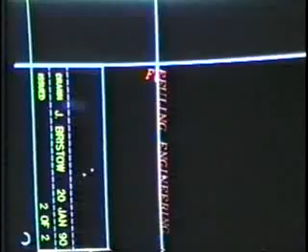You're about to see the Feuling and Rivera 4-valve head designed for the Harley-Davidson Evolution engine. You will see the head in production and an easy step-by-step how to install these revolutionary heads onto a Harley-Davidson motorcycle. The head itself is the brainchild of Jim Feuling, whose engineering accomplishments and world speed records are well known

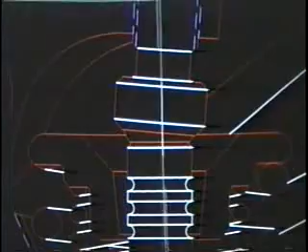throughout the automotive world. He designed the Oldsmobile Quad 4 2.3-liter engine, which puts out over 1,200 horsepower. Jim took this vehicle to the Bonneville Salt Flats and drove it at over 280 miles per hour. That same kind of engineering has gone into the development of these heads. The technology and equipment utilized in producing these 4-valve heads is truly world-class, state-of-the-art.

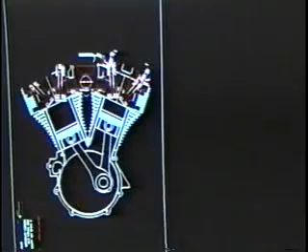The managing editor of Hot Bike magazine rode one of these test bikes throughout the southwest United States. The desert heat and pace was intense, but the bike never failed to provide 100% reliability at astonishing performance levels. We're now going to take a look at Feuling Engineering's manufacturing facility. Here you'll get a look at some of the operations that it takes to manufacture these heads.

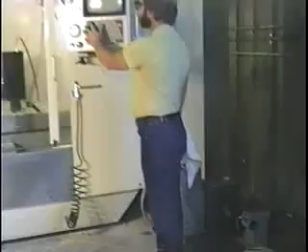After the heads have been received from the foundry, they're installed into this computer-controlled machine. Now this American-made machine is capable of machining 5 separate surfaces in one programming. You're watching it mill out the O-ring groove in the top of the head.

Now this machine is capable of changing its own tools automatically. As you see from this side view, it will also automatically index to the next machining position.

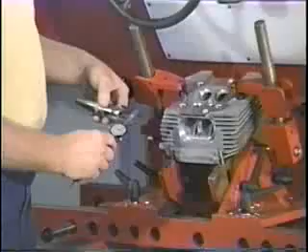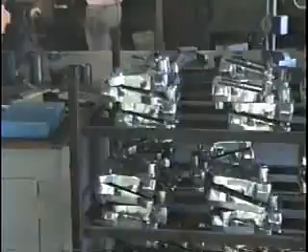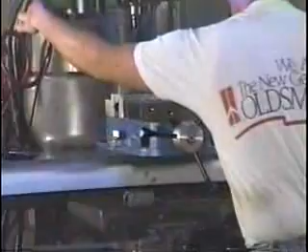You're looking at a stack of polished rocker boxes ready for assembly. And in the background is yet another computer-controlled machine. Now this machine is drilling the oil holes in the rocker arms themselves. And incidentally, these rocker arms have a tensile strength much stronger than the stock rocker arms.

This is one of the test bikes that has just undergone thousands and thousands of test miles. Notice the patented Feuling anti-reversion exhaust system. This exhaust system greatly increases the horsepower generated by these 4-valve heads. And speaking of horsepower, take a look at the bench flow test that these heads have undergone.

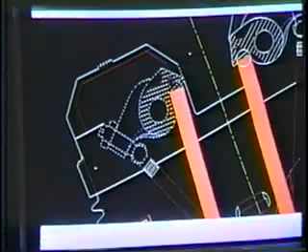It's easy to see that these heads are not copies. These are American-made heads designed by Americans for the American-made motorcycle.

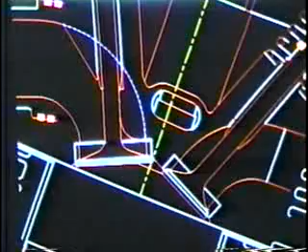And now let's take a look at what the Stage 1 kit has to offer. Now we're going to show you an array of parts and assemblies along with some accessory pipes and mufflers that are available from Rivera Engineering. The heads and the rocker boxes come assembled.

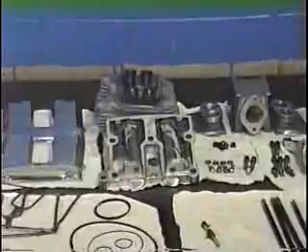After you remove the stock heads from your motorcycle, bolt the cylinders down, taking care that you do not disturb the base gasket. Then you need to install a dial indicator on the front cylinder, put the engine in gear, and rock the rear wheel back and forth until you've found top dead center. Then back the engine up 248 thousandths.

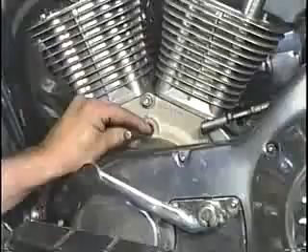Now once you've done this, you'll need to mark new timing marks on the flywheel. Now if you use a center punch, tap very lightly. Only a light mark is all that's needed. And we suggest that you use 3 light punch marks as your new timing mark.

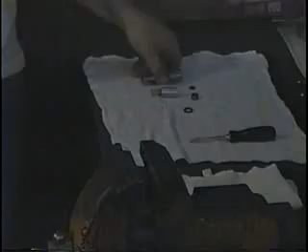Now if you have a stock ignition, or you do not require your motorcycle to rev higher than 5200 RPM, you won't need to disassemble your hydraulic followers. However, if you do require the motorcycle to rev higher than 5200 RPM, you'll need to install rings in the hydraulic followers, as you see here, which will cause these followers to be semi-solid.

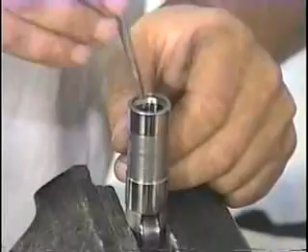Now again, you'll only need to do this if the motorcycle is going to be running higher than 5200 RPM. Now once you've installed this ring, simply reassemble the hydraulic unit.

If you're using a vise to hold the lifter in place while you're assembling it, take care that you do not over-torque or over-tighten the vise on this lifter. Now obviously these rings, if you're going to use them, need to be installed in all 4 hydraulic lifter units.

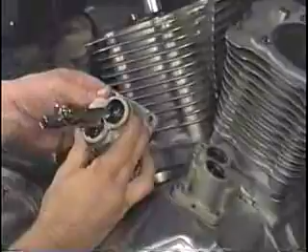And now the lifter units can be reinstalled into the lifter blocks, and the lifter blocks then inserted into the engine. Now we're using a pair of needle nose vise grips to hold the lifters into place. If you do this, make sure that you use very little pressure. Now on the bottom side of this block there is a little flange that will need to be aligned in order for it to drop into place.

Now once you've squared up the block to the engine, go ahead and put the bolts in and then just torque them down. And incidentally, you can find the torque settings for these bolts and others in your shop manual.

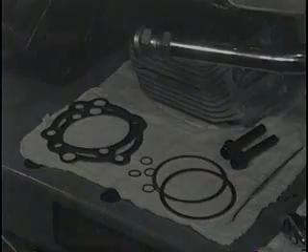Now your kit comes supplied with new head gaskets and dowel pin O-rings. In fact, we supply Millmeyer Pro Street gaskets, which are the best available. Go ahead and put these gaskets and O-rings into place, starting with the rear cylinder. Now the rear cylinder should be at top dead center, compression stroke.

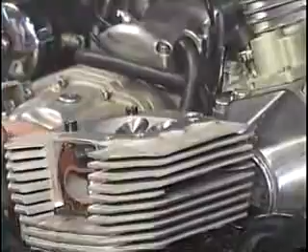The heads come with 2 of the head bolts already in place. Brush on some anti-seize compound, and that should go onto the threads of the head bolts. You should also apply a drop of oil underneath the head of the head bolts. This will ensure a correct and true torque reading.

Again, once the anti-seize has been applied to all 4 bolts and a drop of oil under the head of each bolt, go ahead and torque the head down. The torque sequence and the torque readings required can be found in your shop manual.

Once the rear head has been torqued into place, simply repeat the procedure for the front head. Now remember to put the gaskets into place and the O-rings into place first. As you can see, a dab of anti-seize is being applied to all 4 head bolts, and a drop of motor oil is being applied to each of the head bolts just beneath the head itself.

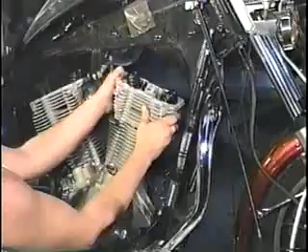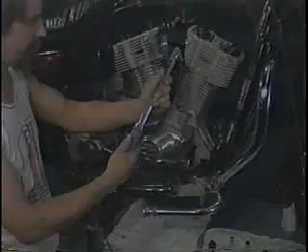When putting the head into place, don't forget that there are 2 dowel pins that need to be aligned up. And once that is done, simply run the bolts down just as you did with the rear head. Now, as the manual indicates, he's beginning with a low torque reading, and he will torque each of the bolts down according to the specifications and the torque sequence in the manual.

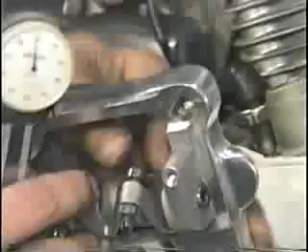These swivel foot adjusters can now be installed into the rocker arms. Simply thread them in, and the locking nut or jam nut needs to be installed on the opposite side. Now, using a dial indicator, you will need to adjust the adjuster on the right side of the engine to 100 thousandths clearance. Now, this clearance setting is for cams which have 500 thousandths lift or less.

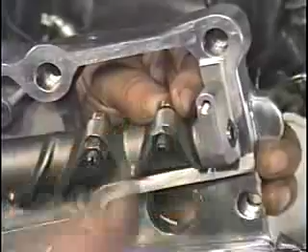Once you have it adjusted, tighten down the locking nut. And after you've done that, it's always a good idea to double check to make sure that your adjustment setting hasn't changed. Now, the adjusters on the left side of the motorcycle will be adjusted later. That's both intake and exhaust.

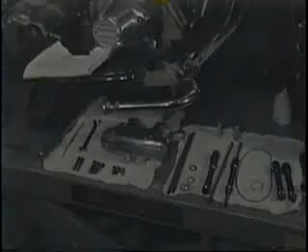Now install the O-rings that fit into the top of the cylinder heads. There will be a small O-ring that will fit around the spark plug hole and a larger one which will fit around the outside perimeter. You simply use your fingers to press these O-rings into place. Take your time and make sure that the O-ring has not been twisted. Now, when these O-rings are installed correctly, they provide an absolutely oil-tight seal.

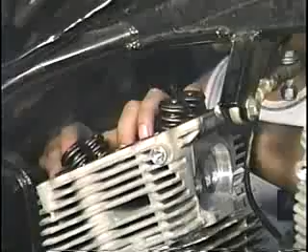Now the O-rings need to be installed on the ends of the pushrod tubes. There will be one O-ring which will fit where the telescopic tubes fit together, one on the top of the tube, and the bottom O-ring can be pushed into the lifter block itself.

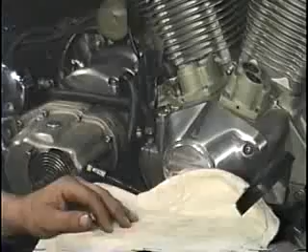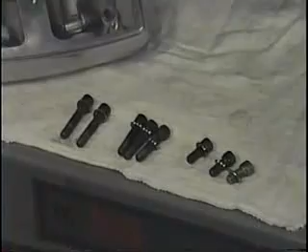There are 3 different sizes of Allen bolts provided to install the rocker boxes. Now, the middle size will need to be put into the rocker boxes on the rear head before the rocker box is slid into position. Also, there is a stainless bolt provided which will be exposed after the rocker box cover has been installed. Now, a dab of anti-seize should be applied to the threads of all of these bolts.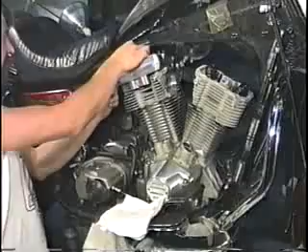Again, using the middle size bolts, put them into the center holes. And then slide the rocker box assembly into place. Now, these center bolts should only be turned in by using your fingers, and they should be turned in 2 or 3 turns and no more. The reason is that you need to be able to move this rocker box up and down in order to get the push rods in place.

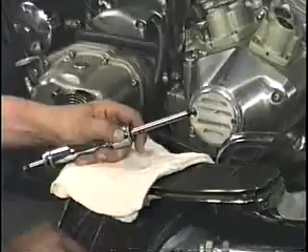A dab of anti-seize compound needs to be put onto the end of each of the push rods. Now the push rods will come numbered 1 through 4. Number 1 push rod is for the very first valve or front valve of the front cylinder. In other words, number 1 would be for the exhaust valve of the front cylinder. Number 2 would be for the intake valve of the front cylinder.

And as you see here, he's installing number 3, which is the intake valve of the rear cylinder. And finally, number 4 would be for the exhaust valve of the rear cylinder. Now it's very important that these push rods are not mixed up or installed by interchanging them. They must be numbered 1 through 4, beginning at the front of the engine, working to the rear.

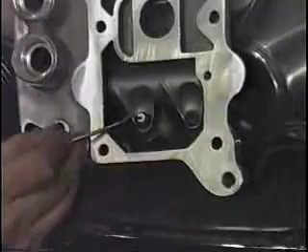The end of the adjuster has a flat ground into the swivel ball. Now this flat must be located in a position so that when it's installed onto the motorcycle, the flat will come into contact with the end of the valve. This is very important. Now the O-rings have already been put into place on the front cylinder, and now the rocker box needs to be put into position.

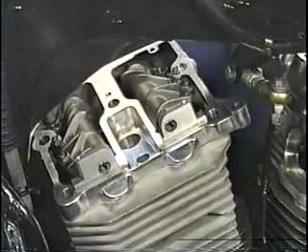Top dead center will need to be located on the front cylinder, and you do this by putting something into the spark plug hole, and with the engine in gear, rock the rear tire back and forth until you've found top dead center. And that of course should be on the compression stroke. And incidentally, whatever you use to find top dead center, it should not be too small or of a shape that, should you drop it, it would fall into the engine.

Now once this has been done, inspect again to make sure that the flat of the swivel foot adjuster is in fact down. Do not oil these adjusters until they are bolted into place. We've found that when you put oil on these adjusters, the flat is no longer visible. The drop of oil will run down onto the foot and you won't be able to tell if the flat is down or not.

The Allen bolts can now be installed. Again, the mid-sized ones will go in the middle, the long ones toward the right side of the motorcycle, and the short ones on the left. The next bolt after this one will be the stainless bolt. It's the one just at this side of the spark plug hole.

Adjusting these valves is actually very easy to do. And we recommend once again that once you have all the valves adjusted, you recheck the jam nuts or locking nuts and make sure that they are secure. Now with a small flashlight with the lights dimmed, look again at all 4 valve adjusters and make sure that the little foot is down. In other words, the flat part of that foot is in contact with the valve stem.

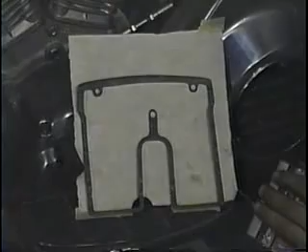And once you've made certain that all four flats are against the valves, now you can go ahead and oil the valve springs and the adjuster foot. A few squirts on each one will be sufficient. Apply a coat of gasket sealer on one side of the rocker box cover gasket. Now this gasket is identical from side to side, so just pick one of the sides and put a nice even coat on the gasket.

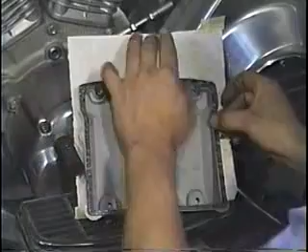Once you've done this, set the gasket aside and then apply an even coat on the rocker box cover. Now the center hole needs a little dab of gasket sealer right there. Now after these 2 parts have had a chance to get tacky, go ahead and put the gasket onto the rocker box cover. Make sure you line up all the edges and then just press it onto the cover.

Now there's no need to apply a coat of sealer on this other surface. You'll want to remove that cover from time to time, and if you glue both sides it'll be very difficult to get off, and it actually is very unnecessary to do that.

The cover is now ready to be slid into place. The bolts that are supplied for the kit come with two washers. There will be a steel washer and a sealing washer. Now the steel washer will go onto the bolt first, and the sealing washer will go against the cover. Incidentally, all of the bolts supplied for the rocker box covers are stainless steel.

Now, in order to install the rear rocker box cover, the intake valves must be all the way open. In other words, the rocker arm must be all the way down. This will provide enough clearance to slide the rocker box cover into place. The pushrod tubes can now be slid into place and the keepers installed.

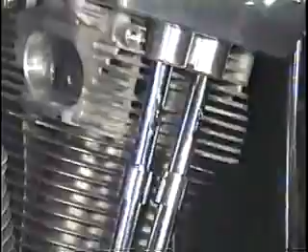The exhaust header pipes are next, and we are using the patented Feuling Engineering anti-reversion pipes. These pipes really add a lot of extra torque and horsepower to the 4-valve heads.

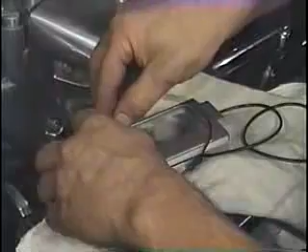Now install O-rings into the intake manifolds using the same method that you used when installing the O-rings on the cylinder heads. Just simply press them into place with your fingers, making sure that they're not twisted. There are two O-rings on the back side. Make sure that you install both of them in the grooves provided.

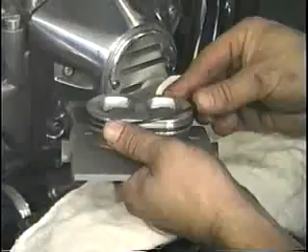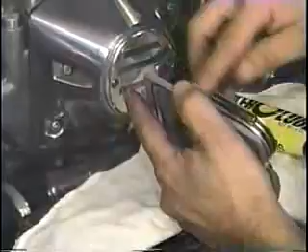You need to apply a coat of O-ring lubricant onto these O-rings. This will help provide a sealing barrier and also allow this manifold to slip easily into the head. A nice light film will do. You do not need to put an excessive amount.

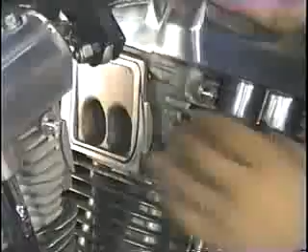Now with the flat of your hand, simply work this intake manifold back and forth. Take your time. Do not exert a great deal of pressure, and just simply work it into place. Now if the O-ring pops out as it did in this case, simply press it back into place. And once again, you need to put a coat of O-ring lubricant on this O-ring. And we've already performed this procedure on the rear cylinder, as you can see.

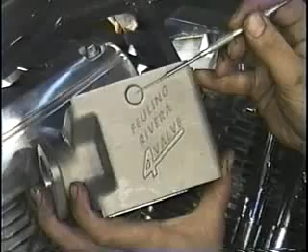The intake plenum has a raised boss area, and this is so that if you are using a stock ignition which requires a VOES connection, you can drill this area out to fit the size fitting that comes with your particular type of ignition.

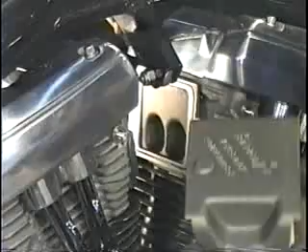The plenum to intake manifold is a very precise fit, so you'll need to take your time when you insert this piece. Now, if you have difficulty in inserting it, double check and make sure that the intake manifolds are pressed into the heads firmly. Now, once it gets started and you start sliding it into place, double check and make sure that the O-rings have not popped out, and then simply slide the piece in.

You can use your finger to reach inside on the near side to check and make sure that the O-rings are in place, and don't forget to go around to the other side and check the back side as well. There are 2 large retaining rings and an insertion tool supplied with the kit. Take the insertion tool and insert it into one of the rings and spread the ring so that it will fit over the intake flange.

Now, once it's fitted over the intake flange, it now must be spread wide enough to fit over the intake manifold ears. Now, if it doesn't easily fit over these ears, simply adjust the tool so that it spreads the retaining ring wide enough to slide over these ears. And now you simply back the nut off and remove the tool.

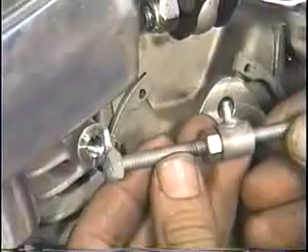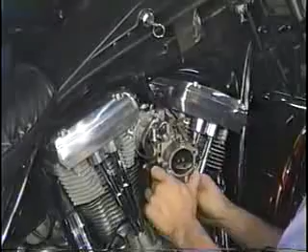These same procedures are used to install the retaining ring on the other side. Next, the carburetor is installed. And you should refer to your tuning instructions for proper jetting. Incidentally, we are installing a stock carburetor.

Now, obviously, if you have an accessory carburetor, the type of brackets that are used on the carburetor itself and the cables may differ. Whatever type of cabling or carburetor you have, you should now check and make sure that the free play is adjusted correctly and that the throttle closes all the way.

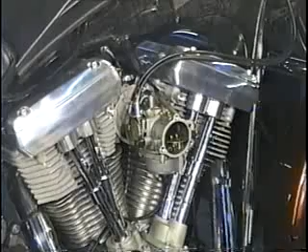Now, depending upon the type of gasoline tank that you have and the carburetor that you have, you may need to put a longer fuel line on the bike. Now, we put a drop of oil in the end of the new fuel line so that it'll slip over the fitting easily.

And now it's a simple matter of assembling the air cleaner backing plate. And once again, in this case, it's a stock air cleaner. Incidentally, some mechanics like to use a drop of Loctite on these inside screws. That would prevent them from accidentally coming out and possibly getting sucked into the carburetor.

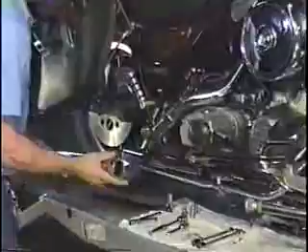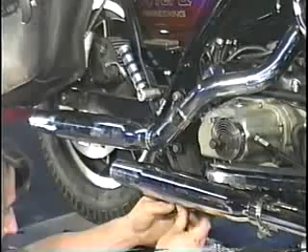Now is the time to go ahead and install your exhaust pipes. And incidentally, we highly recommend that you investigate the exhaust pipes that are offered by Rivera. These pipes are specially designed for the higher output of the 4-valve heads. There are 2 different types that are available now, and there will probably be other types in the future, but these pipes are definitely far superior in performance than the stock pipes.

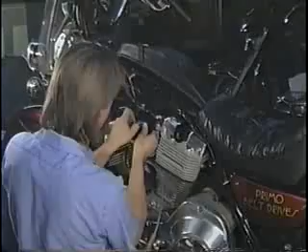Now the coil bracket can be installed. Now this bracket that comes with the kit has a slot in it for the stock choke cable. Also, the hold down bolts go through the 2 heads. The heads have inserts, steel inserts in them for strength.

Now once you've got the choke cable finger tight and the bolts that go through the heads screwed into place where it locates the plate, the bracket, now you can go ahead and put the bolt through the stabilizer. Now while he's putting these bolts in, this stabilizer will probably need to be adjusted on your model. Simply adjust the stabilizer in or out so that the bolt easily slips through the bracket and the stabilizer.

Now make sure that once you've adjusted the stabilizer that the locking nuts are secured tight. And now it's a simple matter of going ahead and torquing down all the bolts that complete this bracket installation. This bracket comes to you powder coated.

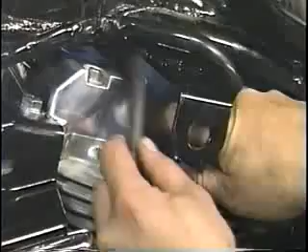To install the spark plugs, use a spark plug insertion tool or a piece of neoprene tubing. Simply press the tubing over the end of the spark plug, as you see here, and install the spark plug. Now you'll want to put anti-seize on the threads. Now make sure when you put the anti-seize compound on the threads of the spark plug that you do not contaminate the electrode.

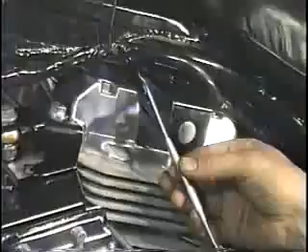Now you can use the air cooling port which has been cast into the head to help get the plug started if you need to. Once the plug has been screwed into the head as far as it will go by hand, then simply torque the plug down as you normally would.

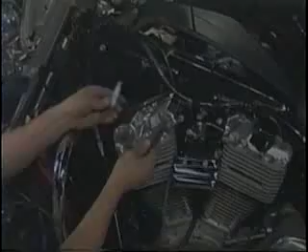The spark plug boot needs to be lubricated with a dielectric grease. And this is so that the plug boot will go down fully over the spark plug itself. And then you can take some needle nose pliers and simply push the boot over the plug, and it will snap into place. Just as you saw with the rear cylinder, the same procedure should be repeated for the front cylinder. You will find that installing the plugs actually is very easy.

A small dab of this dielectric grease is all that's necessary. Incidentally, when installing the spark plug wires or removing them from the plug, don't pull on the wire itself. Always push it on and pull it off by using the boot.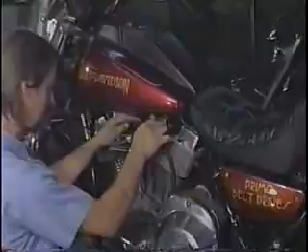Now, if you've had to put on a longer fuel line, now's the time to cut it to length. Make sure you allow a little bit extra so that it has freedom of movement. And now once you've done this, it's a simple matter of clamping it into place.

Now while he's doing this, I'd like to mention that when you've installed your gas tank, take a close look that the rear of the tank clears the rear cylinder. You will probably need to raise the rear tank, and you can do that by simply adding a couple of washers underneath the rear hold-down flange. That should raise the tank enough to where it will clear the rear cylinder.

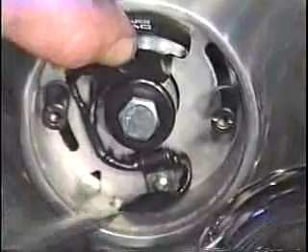Bikes with stock ignitions will have to have the timing reset. Now the timing should be set at 25 degrees total advance. And now after you set this, you need to check with the strobe light that the new timing marks appear in the center of the timing hole window. If not, this needs to be adjusted until it is.

Hi, my name is Mel Magnet, President of Rivera Engineering. Many of you who are viewing this videotape are familiar with my company and the products we manufacture and distribute through our network of dealers and distributors. Our motto has been quality and performance for 17 years, and we are very proud of our reputation in the Harley-Davidson aftermarket. I feel fortunate to have been involved with Jim Feuling in the development of the Feuling Rivera 4-valve heads for Evolution engines. Rivera Engineering is a distribution entity for the 4-valve heads and the patented anti-reversion exhaust system.

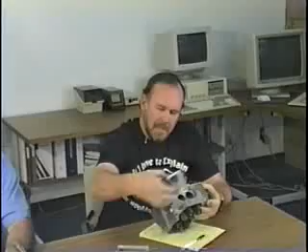This particular cylinder head utilizes the latest technology that we've developed here at Feuling Engineering and initially applied to the Oldsmobile Aerotech high-speed record project. The 4-valve head has a very compact combustion chamber with a centrally located spark plug. This allows for extremely efficient combustion, requiring only 25 degrees total ignition advance. The intake port is the subject of several patents and patents pending. It features a fairing that streamlines the intake valve stem and guide.

The short side, the most critical part of the intake port, is defined by a short side radius description. It's a fourth order polynomial equation, which in layman's terms means a short side that is a decreasing radius energy curve. This provides for a significant improvement in port flow by up to 25% over the best cylinder heads that we flow tested here at Feuling Engineering. Airflow relates directly to horsepower. If we see a 25% increase in airflow, we would anticipate a 25% increase in power.

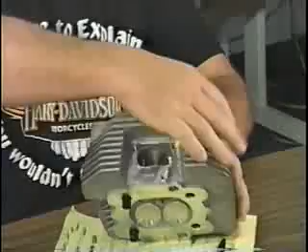The exhaust port on the cylinder head is also the subject of a lot of advance. This particular port utilizes a very high-speed, high-velocity concept. The gas speed in the port at optimum RPM is approximately 450 feet per second, mean gas speed. This high exhaust gas speed provides for much better throttle response, fuel efficiency, horsepower, and also reduces the heat transfer to the cylinder head to a bare minimum.

The rocker arm we have here is made out of 8620. It's investment cast. We call it the Darth Vader rocker arm. It's extremely stiff and utilizes a swivel foot for contact to the valve stem. The intake manifold that you see here is a stub manifold which utilizes O-rings for the seal to the cylinder head and also to the plenum chamber that sits between the two cylinders.

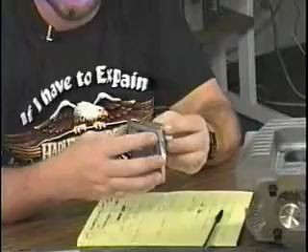The plenum chamber is also the subject of a patent pending. It's available in dual carbureted configuration in stage 2 and a single carb model for stage 1. The dual carbureted configuration as a bolt-on to the stage 1 is worth 12 to 15 horsepower. Throttle response is instantaneous and horsepower is awesome.

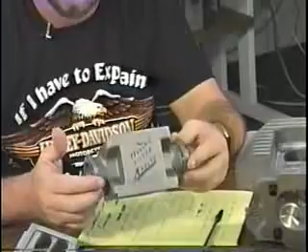We also have applied anti-reversionary technology to the head kit. It's available as an exhaust system package with a zero-loss muffler. The muffler, as a bolt-on, provides for street-legal sound, and there is no visible horsepower loss on the dynamometer or on the street.